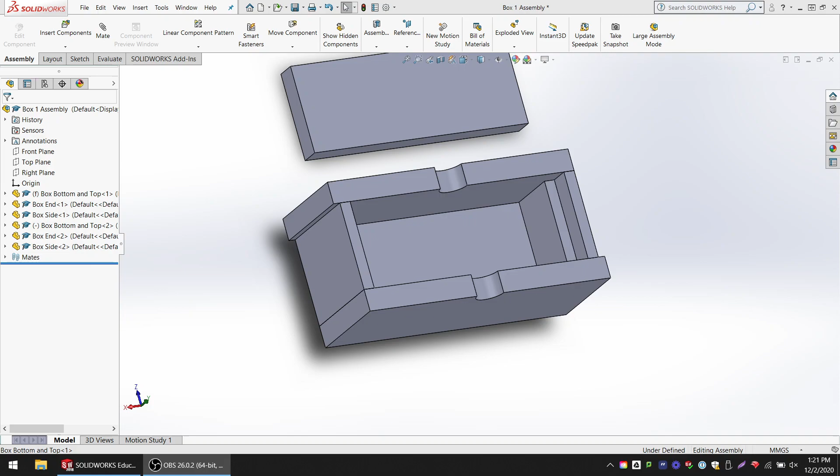Hello everyone, in this video we're going to look at editing a component inside an assembly.

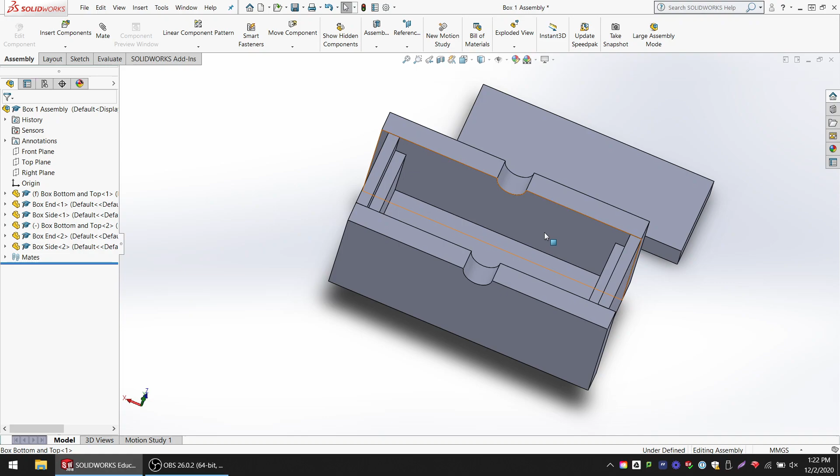As you might have noticed when we were building box 1 here, this side of the box was a little bit too long. You can see that on both edges. This is where working inside an assembly can be a huge benefit, because if I was going to actually build this box out of wood with the measurements I made, my box wouldn't fit together correctly. By modeling it out ahead of time, I saved myself time in the long run versus if I had just started making the pieces, cut them all out, and then gone to put it together and it wouldn't fit correctly.

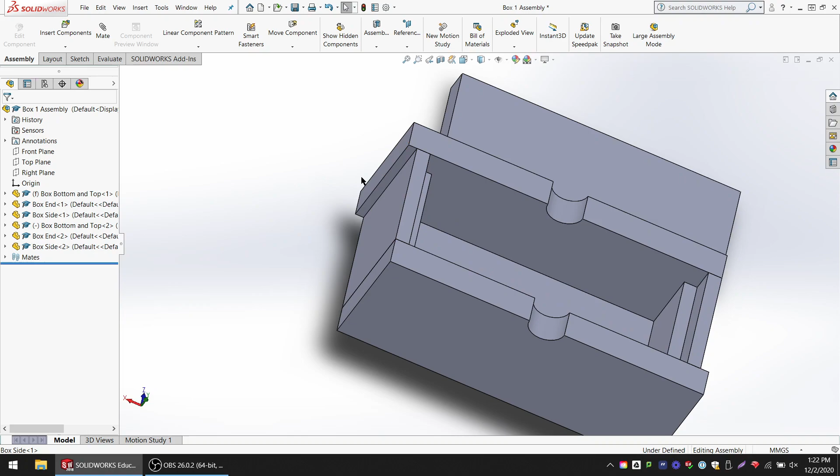So to fix this and change the measurement, this part of editing can get a little bit weird because there's a lot of stuff going on with all the different components in here. This is where keeping an eye on your feature design tree over here can be really helpful to see what you're editing and what's going on.

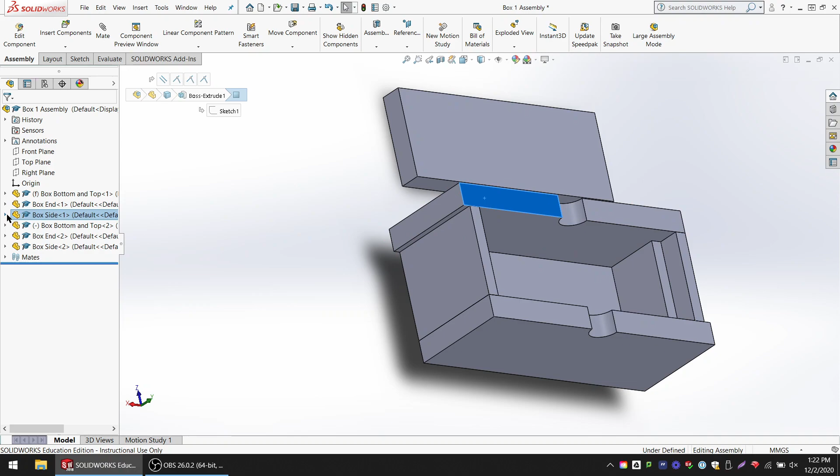I'm going to find one of the sides here. I clicked on it, and you see it highlights over here. If I look at this, I can see this is what we're used to seeing: front, top, right, origin, and then my two boss extrude and cut extrude. So this is how I can edit that part.

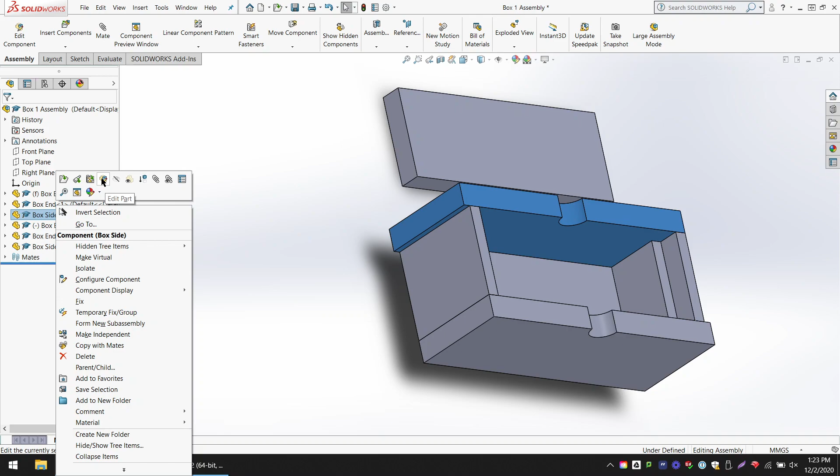If I come over here to box side 1, that's the one I want to change, right click on it. That will let me edit the part. So right here I can edit the part. See, everything else is going to be clear so that I can see what I'm working on.

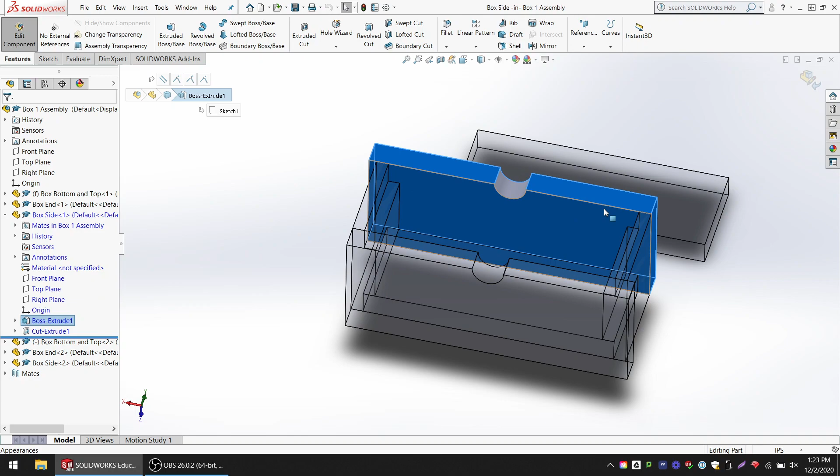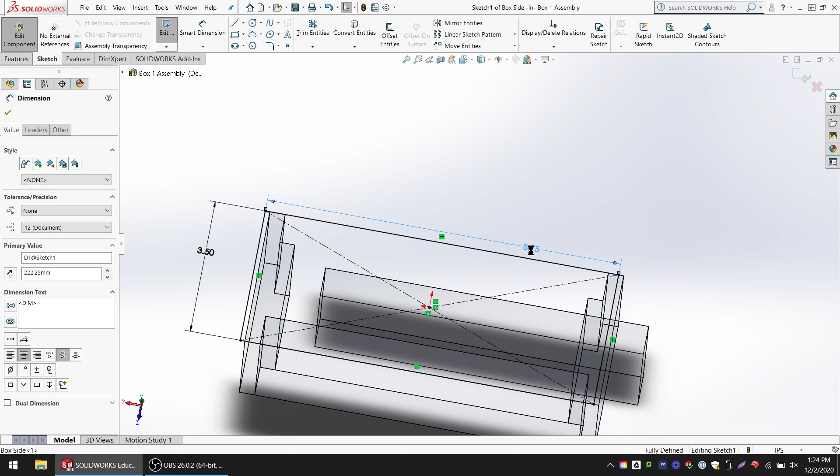Now if I go in here, this would be very similar to what we've been doing. I'm going to find boss extrude 1, which has my length in there. I'm going to right click, edit sketch, and it looks like about a quarter inch. I need to change this 9, so I can double click, change it to 8.75, hit enter. Still not quite there, so maybe half inch—8.5. All right, there we go.

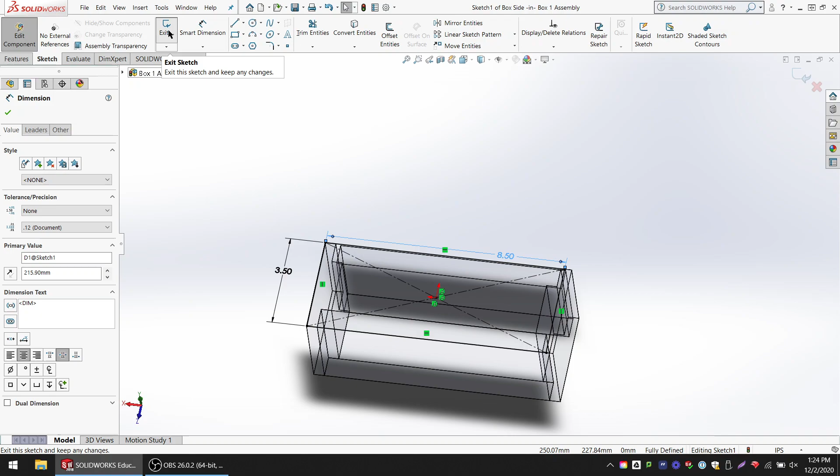When I do that, now my measurement's correct, I can see it lines up. Up here, there's this extra box, but everything else this way is the same as what we're used to using. So I can exit the sketch, and that will put that part back in there. Then up here, this is how I exit out of editing. So if I exit out of that, then it'll put me back here.

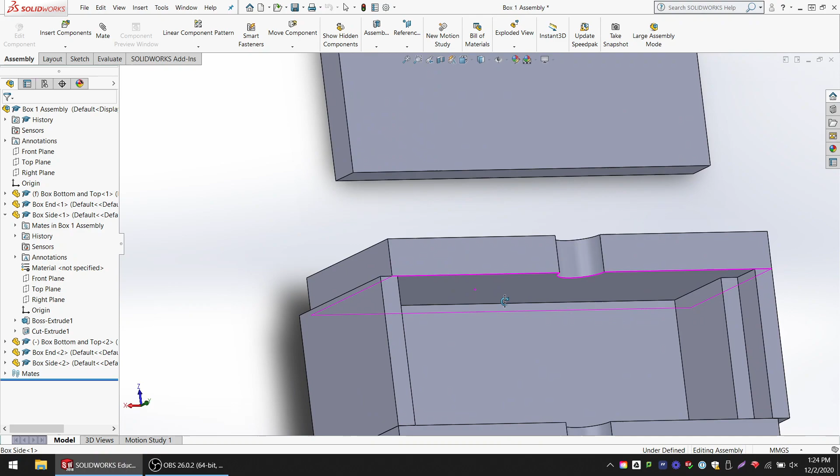You can see that piece is a lot shorter now than it was. It looks like I actually made it too short. So this is, again, why working inside an assembly can be helpful. Apparently I messed that up, I made it too short, so I need to go back in and make changes to that again.

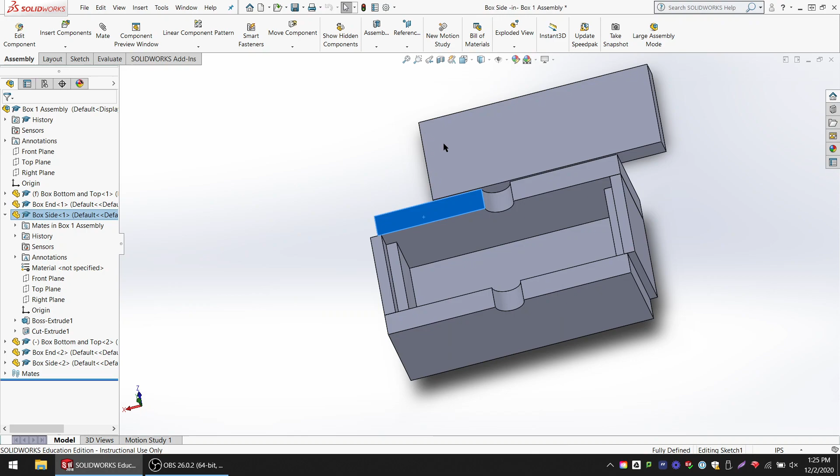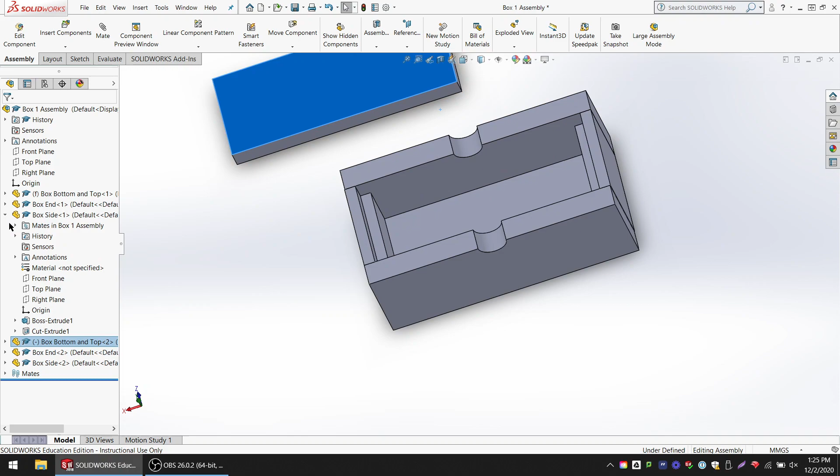So I can click on that, go back into edit part, or you could go in a little quicker and edit sketch here. So 8.75. Then exit sketch, finish editing. There we go. Now my part's the right size, and I can finish by making this box on top there. So there's a lot of things that can go wrong, clicking in different places and clicking on wrong things. The main thing is keep an eye over here on your feature design tree, and this will show you what things you're editing.